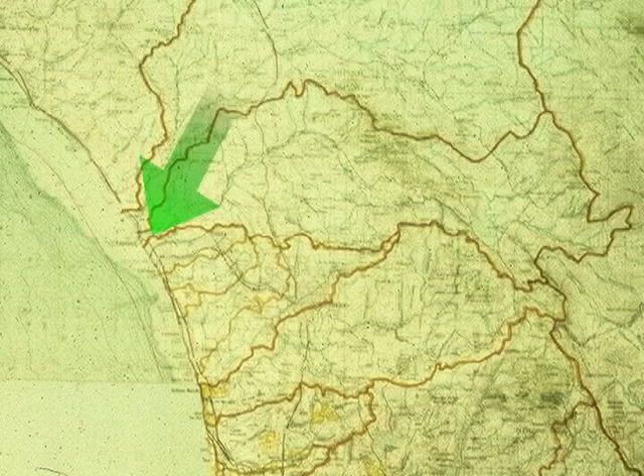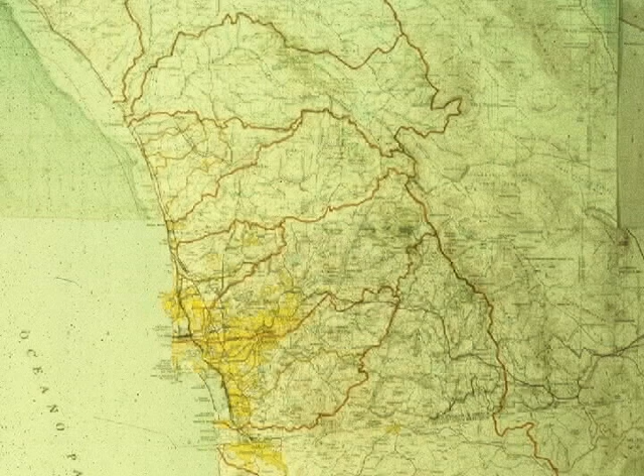Okay, this is the San Diego, Tijuana region. This is about Oceanside here, San Diego, Tijuana, Ensenada down here. What I've done is basically broken it up into its principal watersheds or watershed areas. Any rain that falls east of that line flows down the mountains into the desert, west of that line flows down the mountains toward the coast.

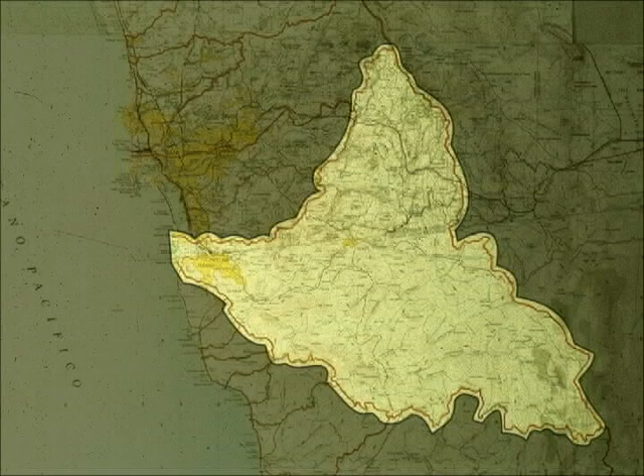This is the Tijuana River watershed. Any water that falls inside of these lines all ends up in the Tijuana River if it isn't captured behind a reservoir. This is the information we need to know to answer the very first fundamental question: where in the region is it appropriate to do what? On the land, off the coast, whatever.

Things like, maybe it's not too smart to build in the floodplain because it does flood and it's going to cause damage, it's going to cost us money. There are a lot of good economic reasons for not doing it, a lot of good ecological reasons for not doing it. I'm going to just flash through a series of maps really quickly.

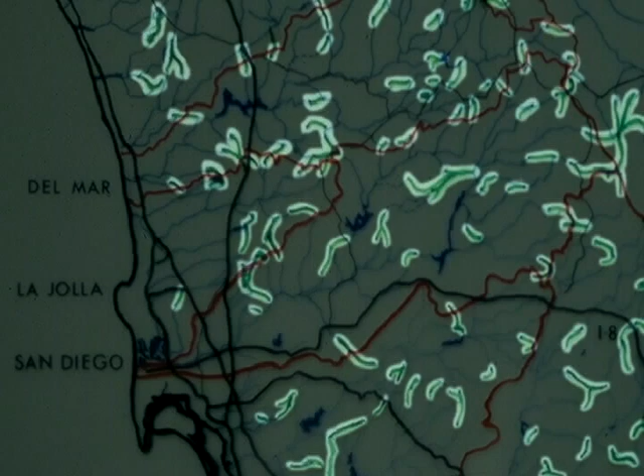So we're looking at our watersheds as natural planning units. These are wildlife corridors, so animals can move from one valley across basins to other valleys, so they're not isolated in one little place. This is geology, which tells us where our groundwater is stored and things like that—very valuable information.

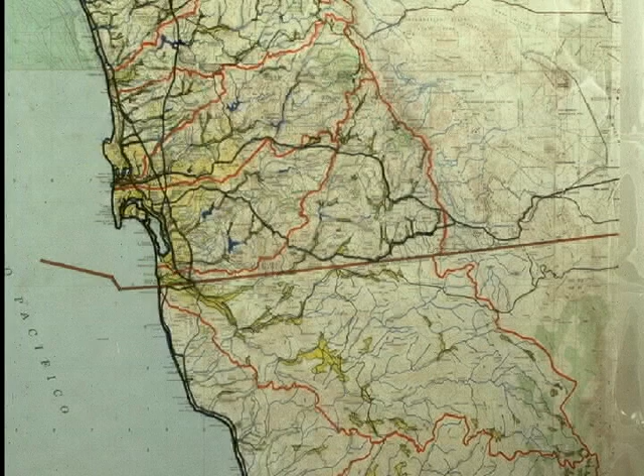So we're basically gathering information to figure out how we use what we have in the most effective way in order to achieve the sustainable future that we want. This is a soils map where it did the details: 74 different soil types in one small drainage basin.

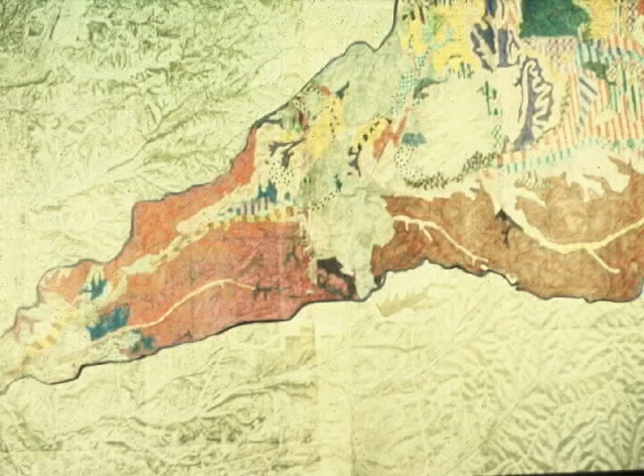This is actually the Los Penasquitos drainage basin, which empties into the Sorrento Valley drainage basin and goes into the ocean just a little bit south of Del Mar, between Torrey Pines and Del Mar—74 different soil types. Then we isolate only the best agricultural soils, and we can see there's much fewer of them.

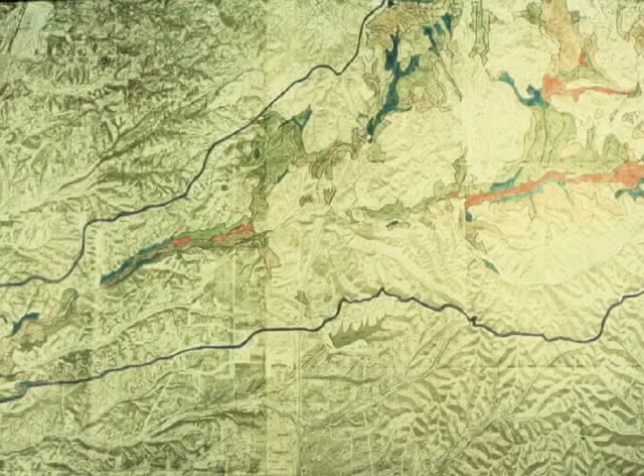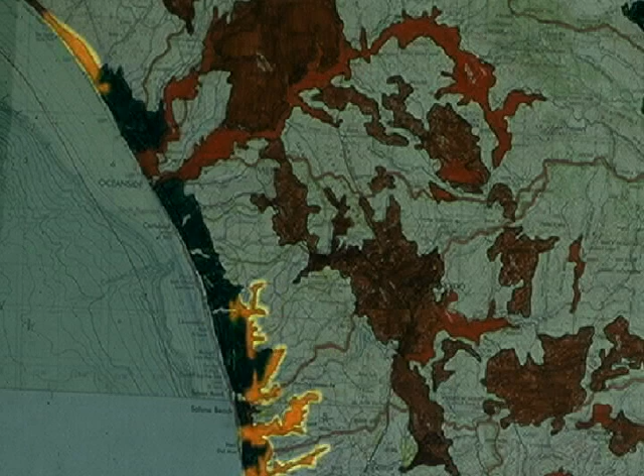Then we look at the whole region. We're basically looking at our four best agricultural soils. The red being the very best, found in the more developed valleys. The orange in the less developed valleys, and then the green is like our blufflands, like the flowers—if you drive up the coast, you see the flower fields. That's bluffland, that's good agricultural soil, number three best. The brown is number four.

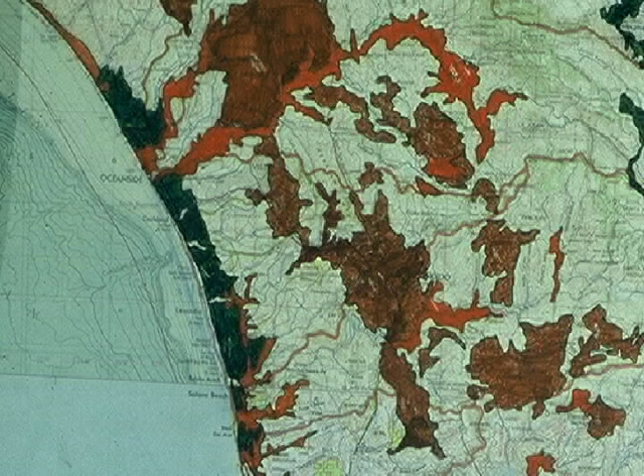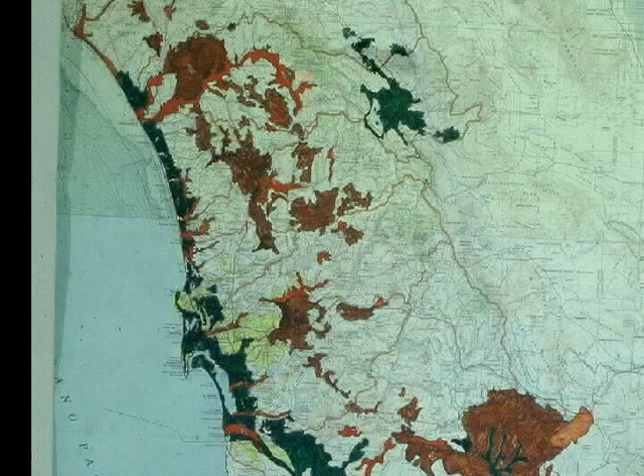We have enough soils here to feed ourselves easily if we have the water, and I'll talk about that a little bit later, how to get the water. But we have to stop developing our agricultural soils, and we have to stop using them poorly, and we have to stop poisoning them, and we have to stop using them in ways that cause them to erode.

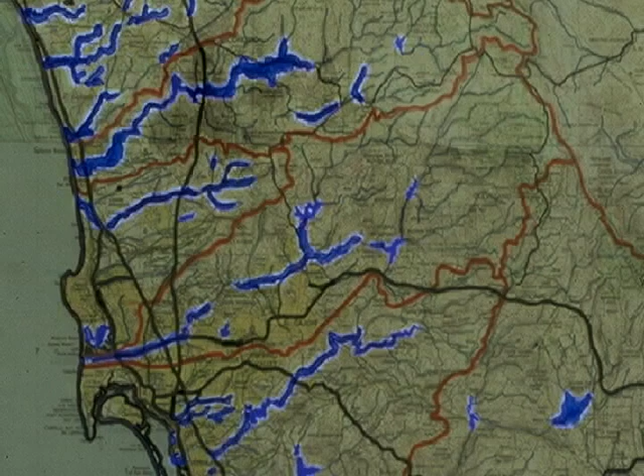We have to stop building in floodplains. Floodplains flood. They're also subject to liquefaction during earthquakes, so not a good idea, not smart.

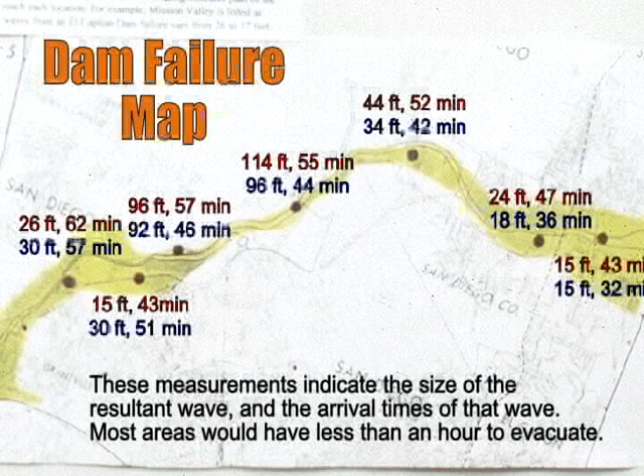This actually shows what would happen if one of the dams upstream of Mission Valley broke when it was full of water, either El Capitan or San Vicente. In some places, the water would be over 40 feet deep. Down further in the valley, even down there by Mission Valley, water would be over 20 feet deep. So not a very pretty picture.

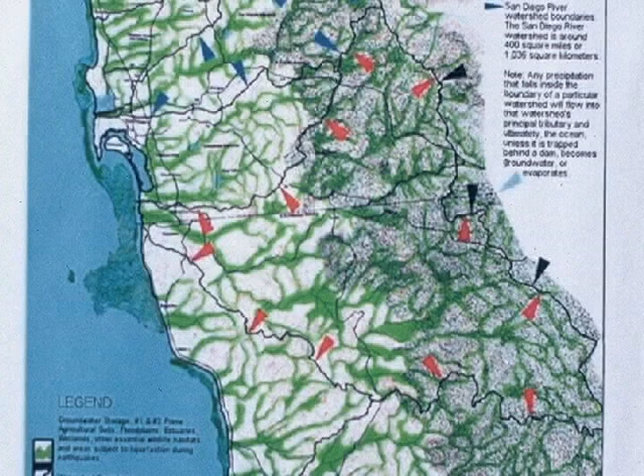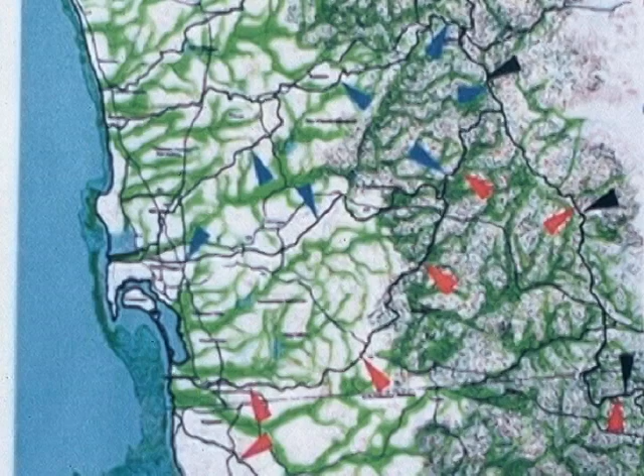Then you put it all together in a map like this, which basically shows the white areas are the places it makes more sense to develop if you're going to have people living here. The green areas, which in this case only include number 1 and number 2 soils, not 3 and 4, are definitely where you shouldn't develop. They're the wildlife corridors, where the groundwater storage, they flood, they're good agricultural soil—all these reasons why we shouldn't be developing there. All that information and a whole lot more that goes with it is all about answering that very first question: if we want to live here sustainably, where is it appropriate to do what on the land?

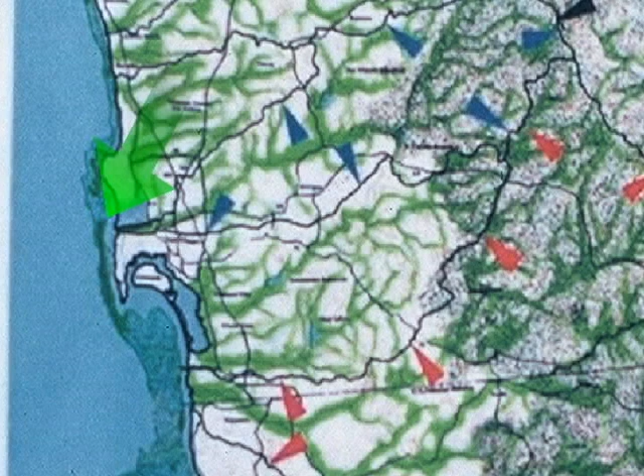And in this case, we included off the coast. The dark area here represents where kelp grows right now. The reason it grows there is because there's a reef out there for it to grab hold of. It doesn't grow here, even though the depths are correct, because the bottom is sandy.

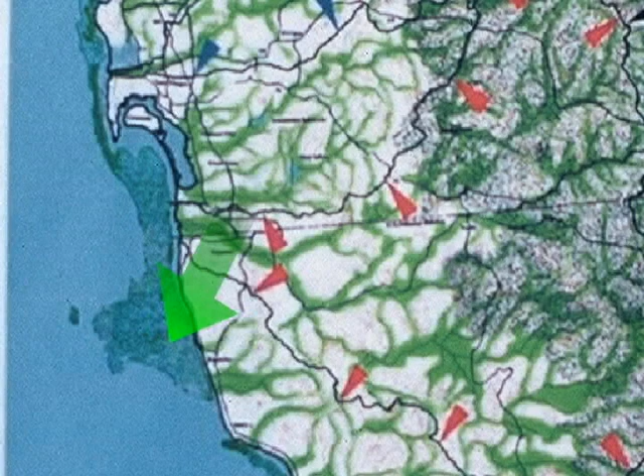You might say, well, we have to be careful if we're going to change that, but there's the possibility that as we gradually take buildings out of the floodplain, like in Mission Valley, we can use the concrete materials and add it on to the existing reef and let the kelp system colonize it. So we actually become reef building. And of course, that would mean more lobster and fish and abalone and all the different creatures that live on an expanded kelp system. It's a little more complicated than that, but it's definitely a potential.

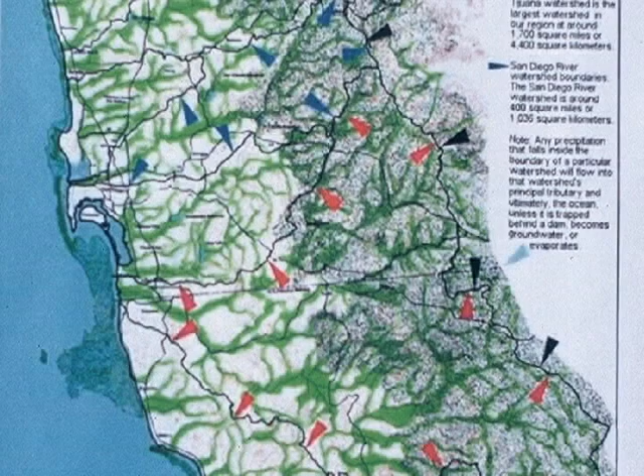Okay, after we've answered the question where do you do the what, then you have to figure out how do you do the what—like in building houses, for example. I'm just going to show you a couple examples real quick. These are houses in the middle of Canada, about 225 miles north of the Montana-Canadian border.

Very cold, 60 degrees below zero is nothing unusual. And yet these houses, which had 2,000 square feet of floor space, had heating bills between $59 and $143 per year—per year—in a very, very cold place. How did they do it?

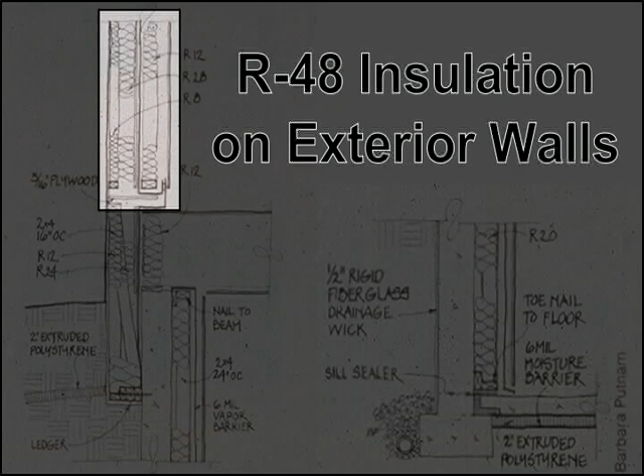Here's some other examples. First of all, they made the outside walls 12 inches thick and filled them with insulation. They actually used cellulose made out of recycled newspaper. They put 2 feet of it up in the attic. They were very careful to seal it up so there weren't a lot of cracks and drafts. With a blizzard blowing through, you don't want drafts coming into your house. So they did a good job of that.

But if you build buildings that tightly constructed and that well insulated, you're going to get a buildup of toxins if there's any toxins in the building—which could be anything from the carpet to the glue holding the veneer on the cabinets, the way things are made now. Even CO2 buildup, or if you have a roommate that doesn't shower often enough, a little problem there maybe.

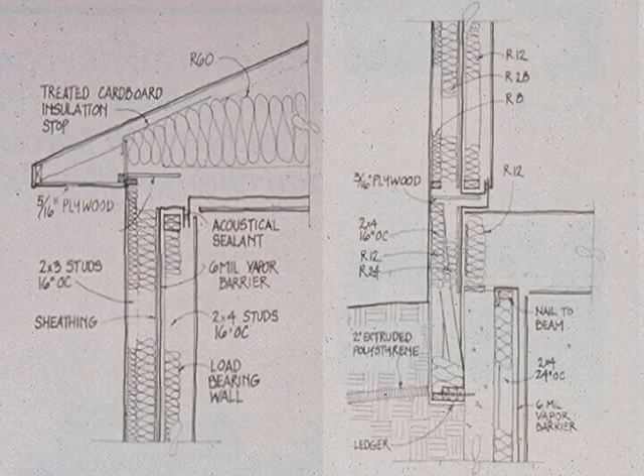So what they do is install this device. It's basically just a box with a little fan in it. It's called the air-to-air heat exchanger, and as the warm, stale air goes out of the room through the box and is dumped out, it gets cooled off, and the cold air coming in goes through the box and gets warmed up, then is released at the floor so it creates a convectional current. What heats the air coming in? The air that's going out. So that's why it's called a heat exchanger—basically it's going one to the other.

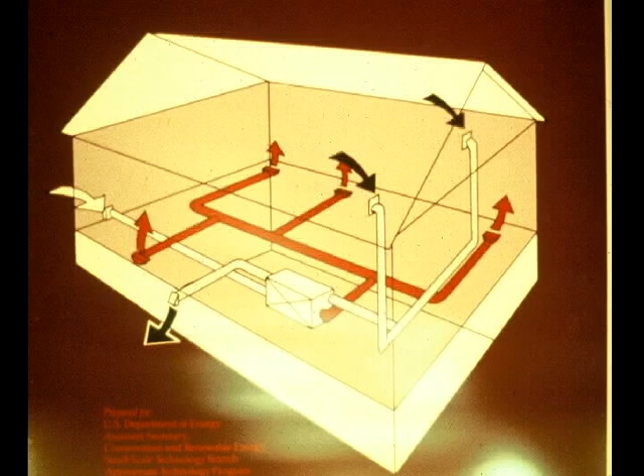You put the motor, compressor, and condenser on top instead of underneath and behind it, so the heat they give off goes away from the refrigerator, and you give it a little better insulation, a better seal on the door, and you're using about 1/10 of the energy you use in a typical refrigerator to get the same job done.

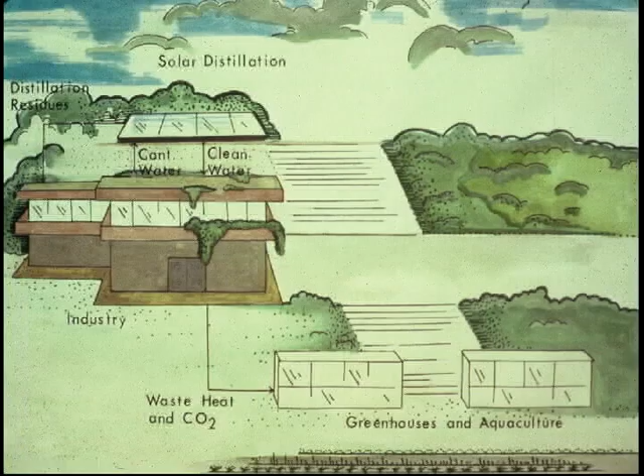So lots of things possible. The integration of industry and waste heat and things like that to help do different jobs. More efficient motors, more efficient lights, more efficient land use.

In Japan, some scientists, quite a while ago, were projecting that Japan, already twice as energy efficient as we are, both in industry and per capita use, could actually become completely renewable energy self-sufficient, replacing all the gas or oil it now imports. And if Japan can do it, which has a colder climate than we do and a smaller land area—Japan only has half the land area of California, and yet has half the population of the United States.

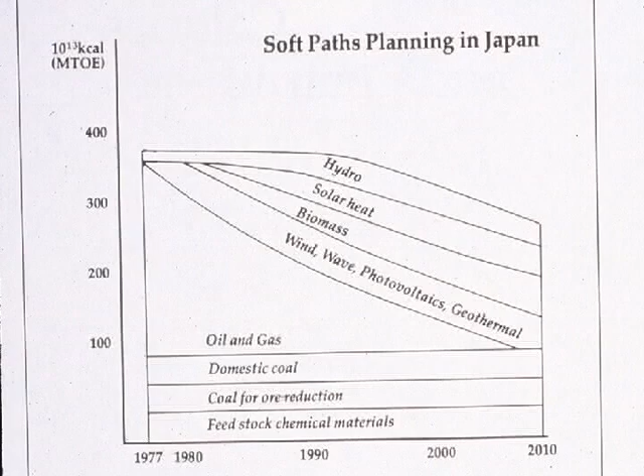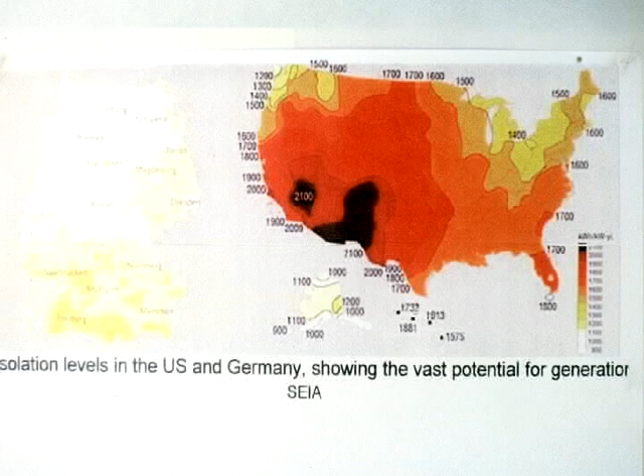I think what they know that we haven't figured out yet is that peak oil is coming, that we're going to hit a very big block in terms of our dependence on fossil fuels. They're trying to utilize renewable energy as fast as possible so that when that does hit, the blow will be softened. And if it doesn't hit for a long time and we do what's right, it won't hit us at all. It doesn't have to be a problem whatsoever.

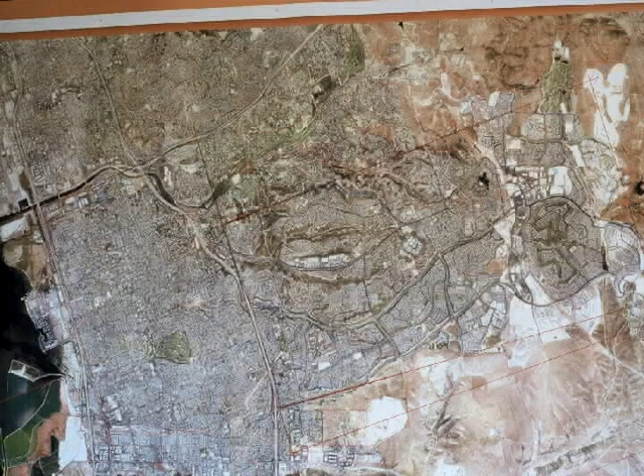But it still shows that you could become completely renewable energy self-sufficient just by putting solar panels on tops of roofs and parking lots. It's just going to take a higher percentage.

And in this case, if we were able to achieve a 40% increase in efficient energy use across the board, we would only need about 51% coverage of our roofs and parking lots to not just be electricity self-sufficient, but to be completely renewable energy self-sufficient, replacing gasoline, diesel, natural gas, everything.

So that shows that it's definitely possible, and that's just roofs and parking lots. I didn't include streets—you could easily put panels along the edge of streets where cars park. There's lots of wiggle room in those numbers, and it's assuming only 10% efficiency for the solar panels, which is very conservative at this time.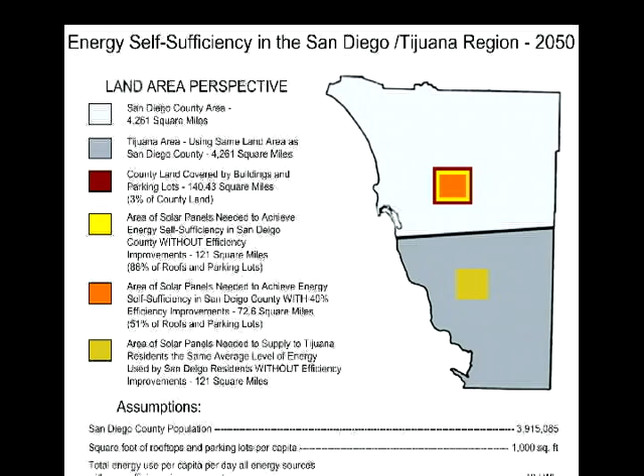So I began thinking about this a while ago, and my first response was, well, gee, we just have to use it more efficiently. I spent hours and hours and days calculating how much water you could use per capita within the natural rainfall totals and how much storage you would need to make sure you had it when it didn't come.

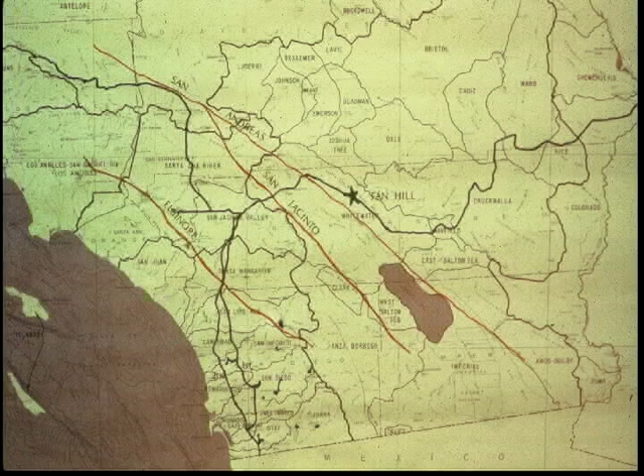I wasn't really much of a fan of reverse osmosis. How many of you have heard of reverse osmosis? Quite a few, okay. Basically, you can pump water through a membrane, and the water that comes out is pretty salt-free. You can pump seawater through a membrane, and when the water comes through, it's pretty much salt-free—not completely, but it's definitely as good as the Colorado River water.

And I always thought, well, if you're doing that, all you're doing is trading fossil fuel energy for water, and that's obviously not sustainable. But when I began doing these calculations about how much sun energy we can produce, I started thinking, well, maybe we could make a dent in our water supply through reverse osmosis.

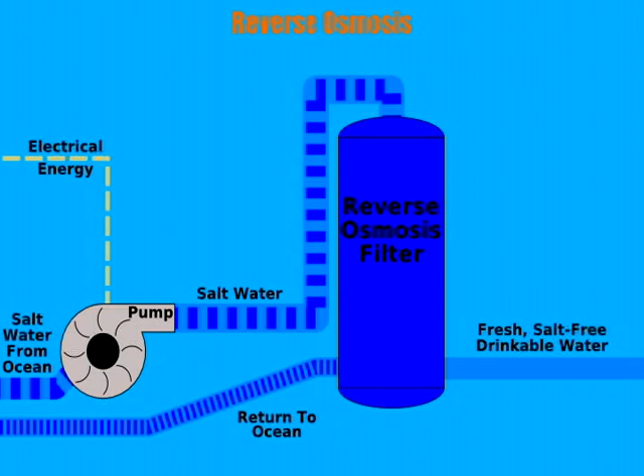I went on the web and found different countries and islands where they use desalination exclusively, and talked with some experts in the field. I got phone numbers and called people up. It turned out you could expect about 50 gallons of fresh water directly from seawater per kilowatt hour of electricity consumed. My first question to these people was, with your system, how many gallons of fresh water do you produce per kilowatt hour consumed? They had never heard that question before, because they're always thinking about dollars and money.

I started thinking, if we install these solar panels and once you pay them off, they basically keep producing electricity for free. Why not install more, and then you have enough to get some fresh water from the ocean? I was, to my amazement, at 50 gallons per kilowatt hour, it would only take 8.3 square miles of solar panels to become completely water self-sufficient, to replace all the water currently used in San Diego County today.

Now, one issue is that you're going to take water from the ocean. That means you've got to make sure you don't suck in wildlife and cause ecological problems in the process. That's a filtering problem, an intake problem. I think that can be solved.

Then on the other end of it, after you've taken the fresh water out, the water that's left over is twice as salty, so you've got to put that back in the ocean. You don't want a fish to suddenly swim into a wall of water that's twice as salty as what it's normally used to. So you have to diffuse it before it gets back out there. They're actually doing this now, so before it even gets to the ocean, it's already diffused, where it's only maybe a couple of percent saltier than when it came in.

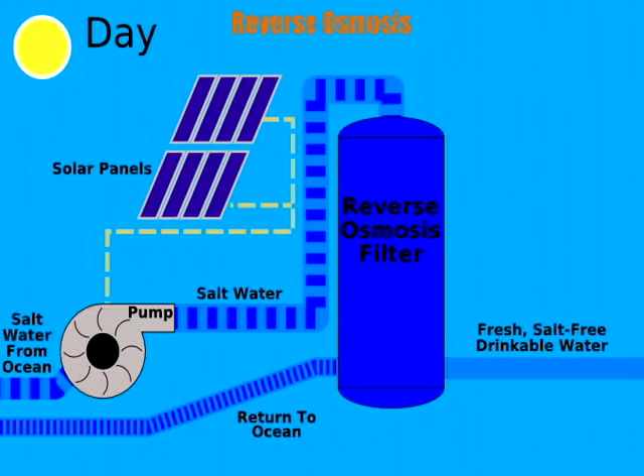If we're water self-sufficient and we want to grow food, now we have water, now we can grow food. And if we need more water, we add a few more square miles of solar panels to provide the energy to convert the seawater into fresh water.

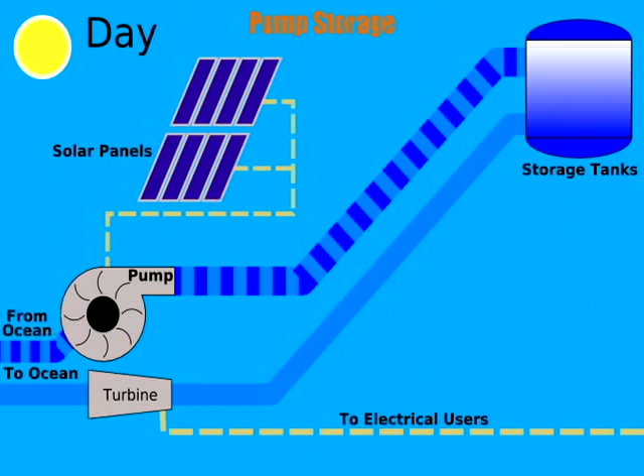Even for energy storage, we can pump seawater from the ocean to the top of the mountains and run it back down through turbines at nighttime to make electricity, back into the ocean. In this case, you're not even changing the salinity of the water, you're just moving it from one place to the other. When you have energy in the daytime, you pump the water up. When you don't have energy, the water runs downhill and produces the power you need.

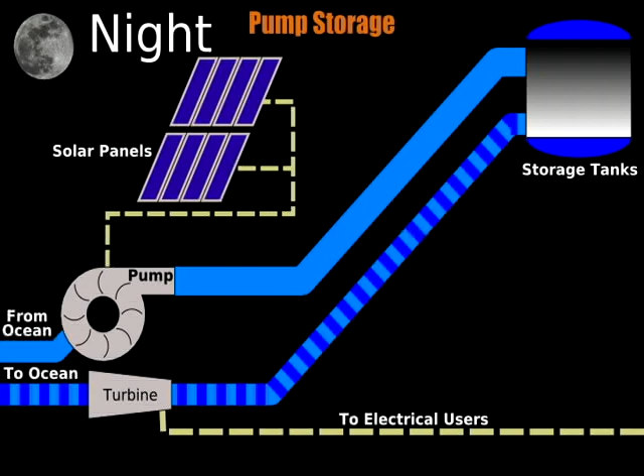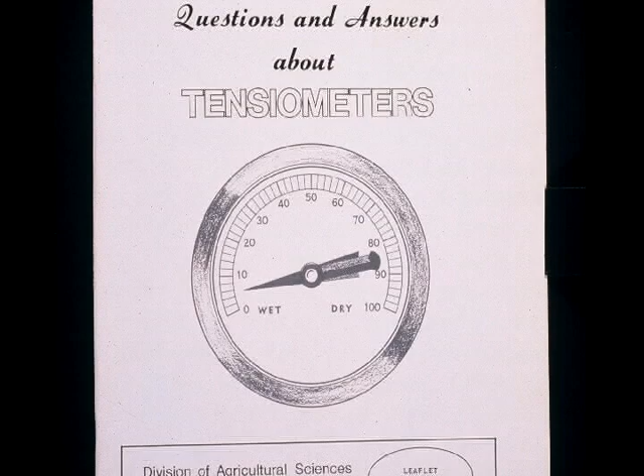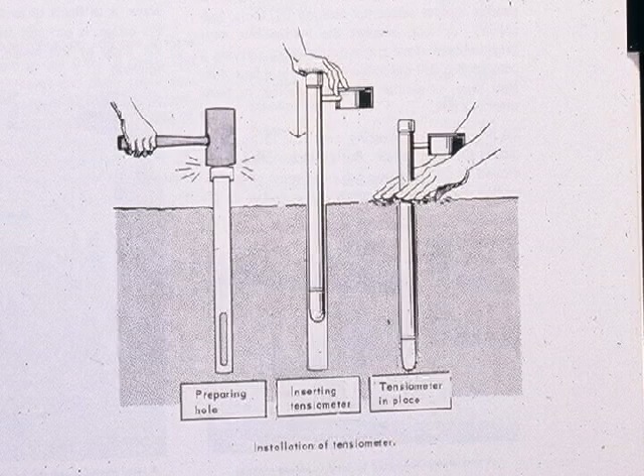To get back to the water here, what do we do with it? It's really the same thing as with energy. Use water more efficiently: low flow showers, low flow toilets. A lot of these are very standard now. Composting toilets make sense. Tensiometers monitor your irrigation, telling whether water is needed or not before irrigation goes on, because they directly sense the moisture available to plants in the soil. Then you hook that all up with efficient irrigation equipment, so you're getting water exactly where you need it when you irrigate, whether it's in agriculture, industry, or just domestic use.

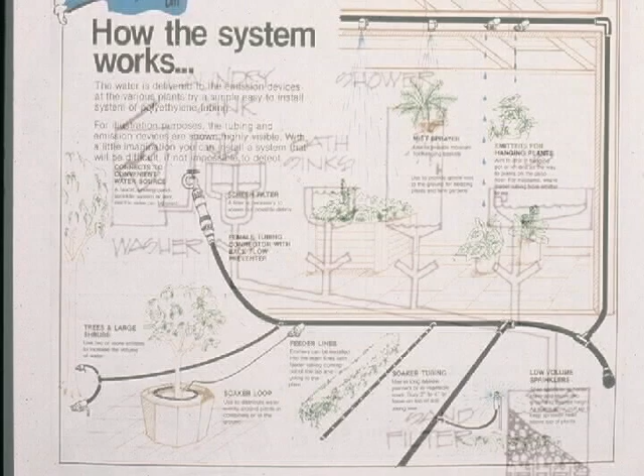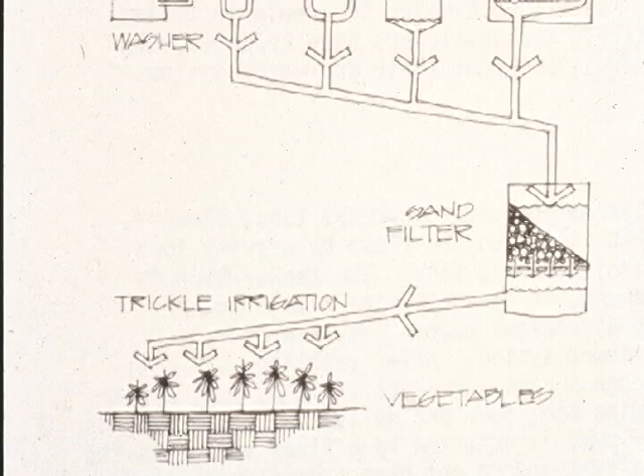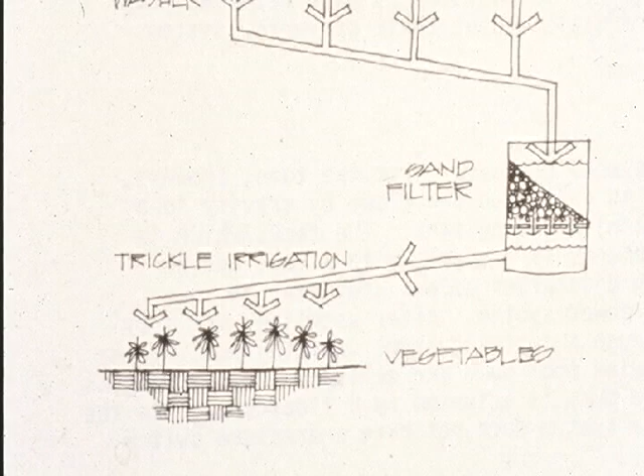Gray water systems are technically legal, but the ones the county wants you to do are very stringent and don't really make that much sense in my view. But I noticed there's no gray water police out there, so I run my washing machine water out, and these trees that it ends up on are growing like crazy. Of course, I use biodegradable soap and I'm very careful about what I put down the drain. When it's in your own backyard, you want to be more careful about those things.

So you can recycle the water with drought-tolerant landscaping. Landscapes like this don't need watering once established, so you have plenty of water. You have your gray water system to grow a garden, fruit trees, or a little grass in the back to take in some sun. What you end up with is a water service level that's actually very high, better than before, but the actual amount of water you're consuming is much less, because you use it once efficiently and then recycle it into your gray water system to use again.

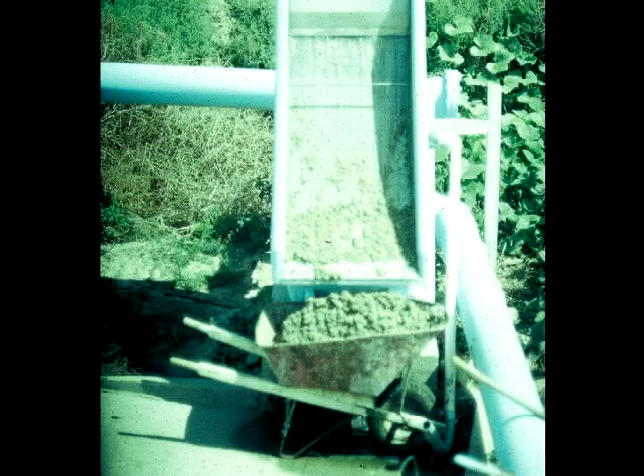This is Eco Parque, a plant that takes sewage water, recycles it, and turns it into irrigation water and compost. It's about halfway between the two border crossings above the river, on the north slope facing south. We're taking raw sewage out of the pipe that runs down the road, running it through a process, collecting the residues, screening them out, and then composting them while clarifying the water.

You can see the greenery starting to happen. I need a new slide here because the one I have doesn't do it justice, but from here it gets pumped up the hill and that water is used for irrigation. So theoretically you can have a wastewater or sewage treatment plant where nothing goes into the ocean. The solids are composted, the water is used for irrigation, and in effect the soil where you use the irrigation becomes the tertiary treatment process for the water. The plants love those nutrients and will quickly turn them into biomass.

You can see all the greenery here. The whole thing is now green, but this was just the first stage. What's happened is all kinds of wildlife have come back to the area. People come here all the time, they have picnics here and weddings. It's all beautiful, and a developer built some houses down below it. Now all this is kind of luxury housing. So we took sewage and converted it into this big green area. When they put up their signs to attract people to live there, they said 'come live next to Eco Parque.' By taking this nasty, icky thing and turning it into something positive, it did a lot of good economically and otherwise.

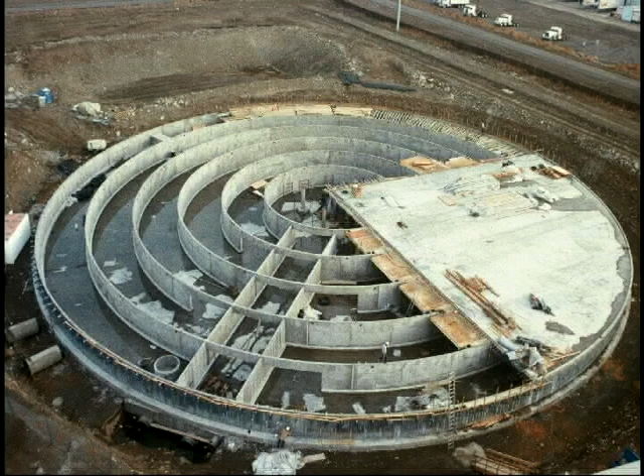And then there's collection of water, this doesn't show it, which is the point. There's a water tank underneath this tennis court collecting rainwater. This is kind of how these tanks are constructed. You can build them anywhere you have water, cover them, and have parks and recreation areas all around them. The idea is you'd have one or more of these in every community, and on top of them there'd be a park, community garden, or soccer field, depending on the size of the tank and whatever the community decides.

And you would have water storage. This is important, because if there's a disaster, say a big earthquake, there may be a reservoir 20 miles away that doesn't fail in the earthquake, but it's quite likely the pipe between you and that reservoir will fail. If you have water in your community, you have it right where you need it in case of a serious problem. You want to create your system for sustainability, kind of like nature is, with a sort of redundancy.

If you had a good place to do it, it would be perfectly fine to have a cistern in your backyard, above ground or below ground, it's up to you, so that you could collect water from your rooftop. Every 1,000 square feet of rooftop at 12 inches of rainfall represents 7,500 gallons of water. So if you've got a 2,000 square foot house, that's 15,000 gallons of water, enough to give you 40 gallons a day for virtually forever, if the rainfall holds. But in any case, you're going to be in better shape than other people.

But as a political figure, as somebody who is likely to run for mayor again, I would be directing this to happen and to get it financed. The whole idea is that as you're moving towards a sustainable economy, you're creating new employment opportunities. Instead of doing things to make money that are ultimately bad for the planet, you'd be doing things to make money that are ultimately good for the planet. And that's the bottom line here.

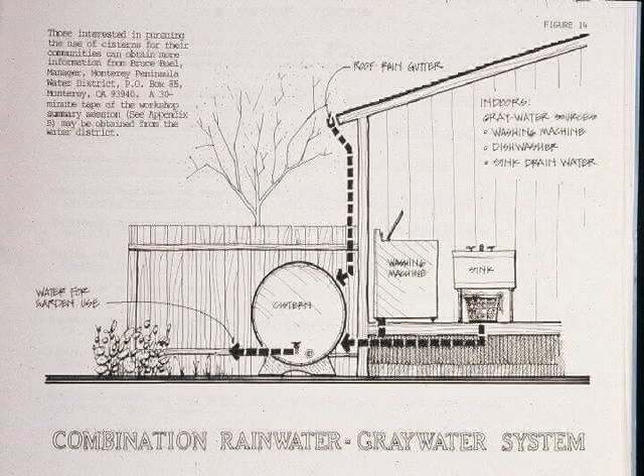And along the river, you have wildlife corridors, and you have corridors that go up the side canyons like Texas Street, across the mesa to the next canyon. So a coyote or a bobcat are animals that would normally be in that habitat and move around.

Then you have your agricultural aspects to it. Connected with it, you're going to have a little different kind of agriculture where you're going to actually design it to maximize the habitat for the predators of the pests that might attack your crop and minimize the habitat for the pests that might attack your crop.

So you have different kinds of plants spaced with something between them, so some kind of epidemic of a disease or a pest can't just move easily from one to the other. Plus your wildlife corridors are going to have all kinds of animals in them, birds, nesting, and so forth.

You can even design it a little bit, add a lot of tall trees so you have plenty of places for hawks and owls to nest, so they can take care of your gophers and ground squirrels and field mice and things like that.

And you'd have snakes and coyotes and bobcats and things like that coming out of your wildlife corridors to help you in that case. So basically the idea is that you can design a system that works relatively automatically, and if some pest didn't follow the program, we still have all kinds of non-toxic pest control methods to deal with them, especially when you design your whole system to defeat them to begin with, which makes it much easier to address any kind of a problem or outbreak that might occur.